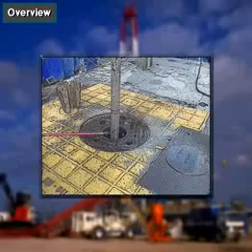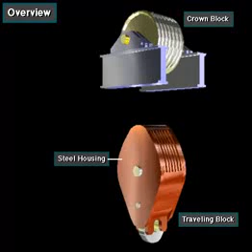A traveling block also has several side-by-side sheaves. A steel housing encloses them. Crew members thread or reeve the drilling line over the sheaves. A hook is attached at the bottom of the traveling block. The hook suspends the swivel, kelly, and drill string, or a top drive and drill string.

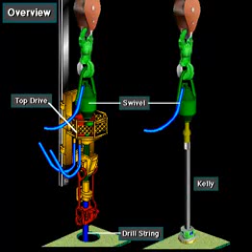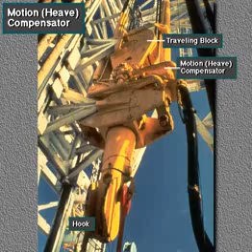This is a traveling block on an offshore floating rig. It has a drill string motion compensator. The motion compensator is between the traveling block and the hook. Offshore floating rigs move up and down with sea movements. The motion compensator maintains drill string position by counteracting up and down vessel movement, or heave.

On some semi-submersibles and drill ships, rig owners mount the motion compensator on the crown, or the top of the derrick. The compensator eliminates the motion of the drill string from the hook to the bit. As the vessel moves up and down, hydraulic pressure inside a piston and cylinder keep the hook in a fixed position relative to the seafloor.

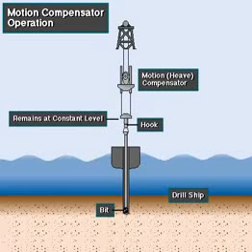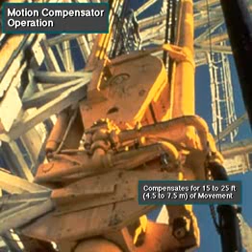The compensator keeps the drill bit on the bottom of the hole, within the weight on bit limits set by the driller. A typical compensator can compensate for up and down movement as much as 15 to 25 feet, 4.5 to 7.5 meters.

Typically, two sizes of motion compensator are available. One can handle loads up to 400,000 pounds, or about 180,000 kilograms. Another, which is bigger, can handle loads up to 600,000 pounds, or about 270,000 kilograms.

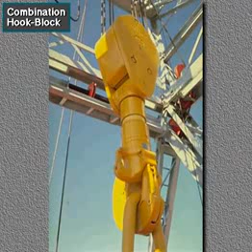Some traveling blocks have built-in hooks. They are a single integrated unit. The combination hook block is shorter and therefore allows more traveling distance when mast height is limited.

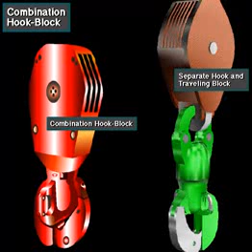Typical combination hook blocks have load ratings ranging from 175 tons to 650 tons, about 160 to 590 metric tons.

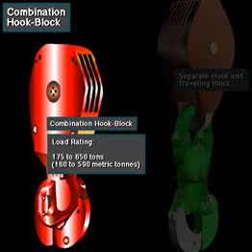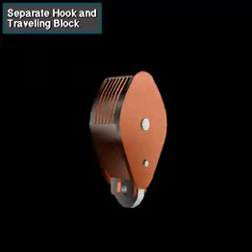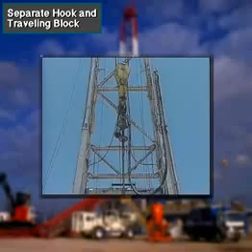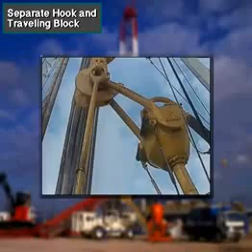Some traveling blocks and hooks are separate units. In this type, the bail of the hook fits into a clevis on the bottom of the traveling block. Crew members suspend the swivel and drill string from the hook. They open the hook's latch, insert the swivel's bail, and close the hook's latch. A safety catch ensures that the hook stays latched.

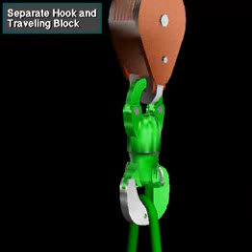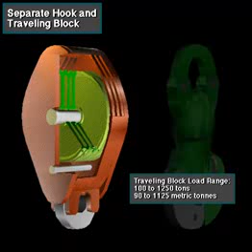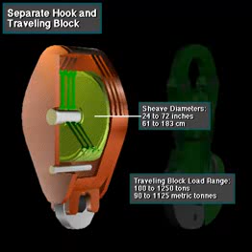Separate traveling blocks are available in load ranges from 100 to 1,250 tons, or about 90 to 1,125 metric tons. Sheave diameters range from 24 to 72 inches, 61 to 183 centimeters, that's 2 to 6 feet, or over half a meter to nearly 2 meters in diameter. Hooks have load ratings of from 350 to 1,000 tons, about 300 to 900 metric tons.

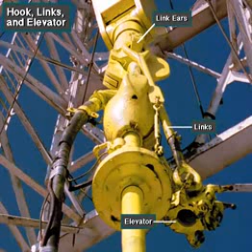The hook has two link ears. The crew attaches one-piece forged links and an elevator to the ears. They lock the links to the ears with the link locking arms.

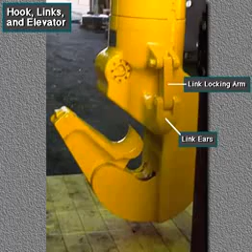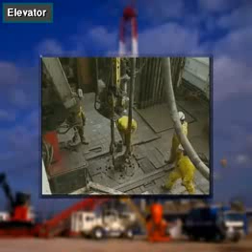Crew members latch the elevator to tubulars, joints of drill pipe and other types of pipe, as they run them into and out of the hole. Crew members latch the elevator around the top joint of the drill pipe. Then, when the driller takes in drilling line, the traveling block goes up, raising the elevator and attached pipe. Conversely, when the driller lowers the traveling block, the elevator and attached pipe also go down.

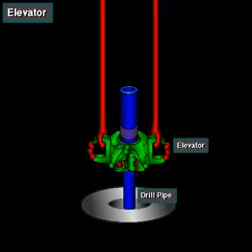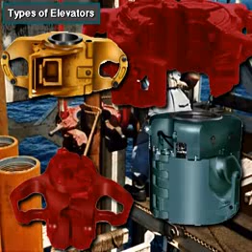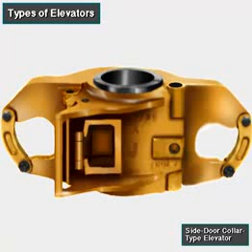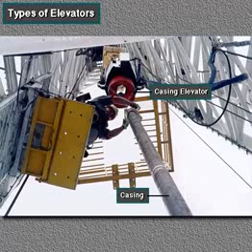Crew members use many types of elevators. Which one depends on the kind and size of the tubulars. For example, most drill pipe and lifting subs require a center latch bottleneck elevator. But some drill collars require a side door collar type elevator. Tubing, a lightweight pipe used in completing wells, usually needs a slip type tubing elevator. Casing, large pipe the crew lines the hole with, requires a special heavyweight casing elevator.

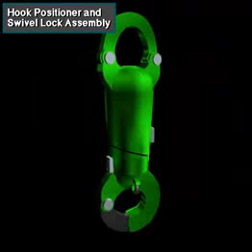Most hooks have two locks: a swivel lock and an automatic positioner lock.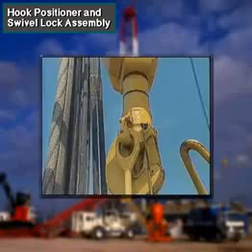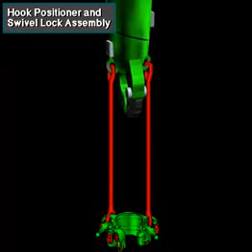Crew members use a long steel rod called a shepherd's stick or a chicken hook to unlock and lock the rotation lock and the automatic hook positioner. When crew members unlock the rotation lock, they rotate the hook to make the elevator face in the desired direction. Once positioned, they lock the rotation lock to keep the hook in position. Crew members can also release the rotation lock when the hook needs to rotate freely.

The other lock, an optional automatic hook positioner, prevents rotation of the elevator links when the hook is traveling empty. Normally, just before making a trip in cased hole, crew members unlock the rotation lock, turn the hook, and relock it so that the elevator faces the derrickman. This makes it easy for him to latch and unlatch the elevator.

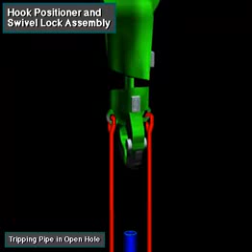If crew members are tripping pipe in open hole, they activate the automatic hook positioner. This lets the hook rotate freely when hoisting the drill string. Allowing the drill string to turn in open hole as it is being pulled keeps it from damaging the hole and prevents the reeved drilling line from twisting.

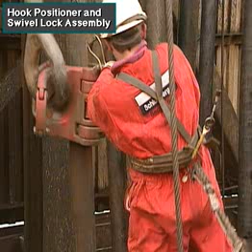Then, when the elevator reaches the derrickman and the driller stops hoisting, the positioner automatically rotates the elevator into correct position for the derrickman.

Inside the hook is a hydraulic snubber. The snubber is like a shock absorber. It prevents drill pipe bounce and tool joint damage when spinning out the connection.